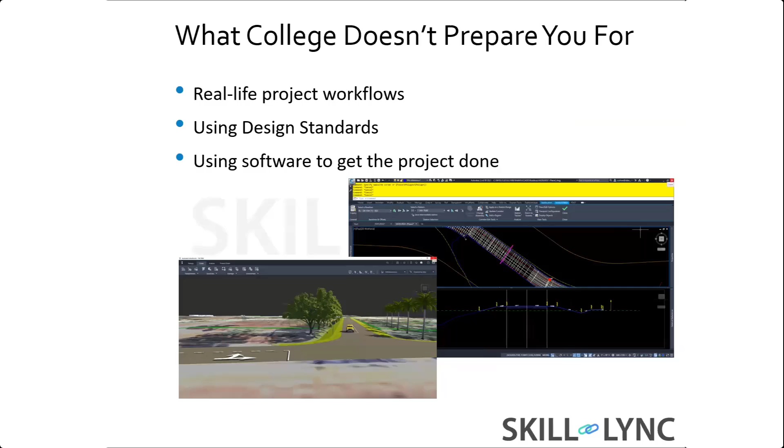Also, they don't educate you on using design standards, which is a crucial part of understanding how to actually get a project done. And of course, the biggest thing in this day and age is the software. That's really crucial for having a good basis for getting a good job and working with an engineering firm. All right, so let's go over today what the actual process is.

And again, every agency is going to vary. I'm in the United States, and every municipality will vary, but there is a generic workflow that you will typically follow. There's minutia in every part of the process, but for the most part, that's what I'm going to discuss in this presentation.

All right, so the first thing, and again, this is something you can do on your own, wherever you are, is really educate yourself on what the design standards are in your region of the world. Where are they? Where do you find them? Deciphering them. Just to give you some examples here, I'm in Florida in the States, and this is a set of Florida DOT standards.

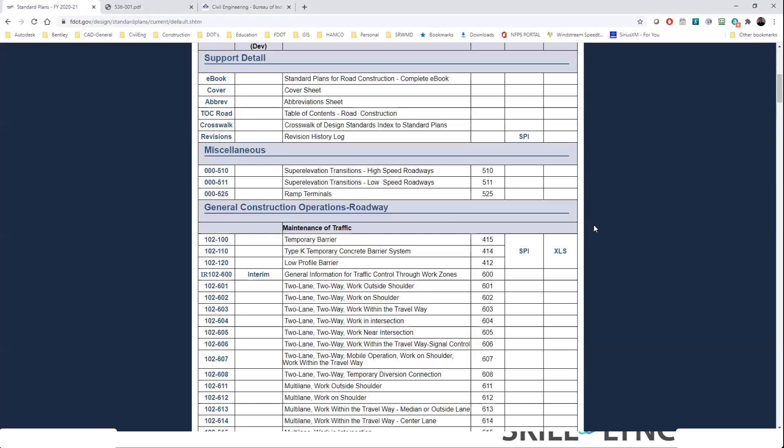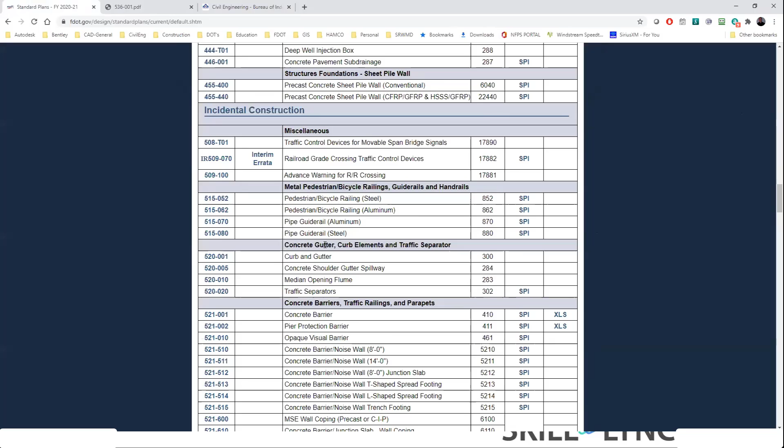The reason you want to be really familiar with these is that when you're designing your projects, the engineer will say, okay, did you look at the design standards? Have you checked this? So for instance, if I was doing guardrail design, you'll have these different numbers that relate to the specific thing that you're designing. So here's 536-001.

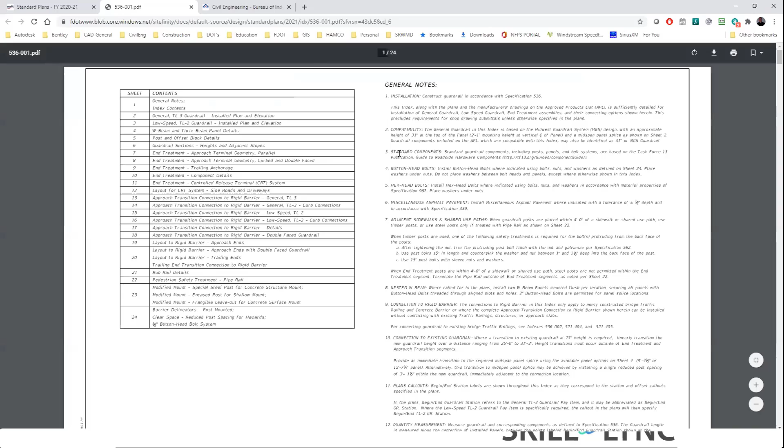If I bring that up here, you'll see there's a whole bunch of notes and dimensions and ways of actually doing this. So if you were doing some guardrail design and you're going to draw it up, let's say in CAD, you're going to have to know exactly how to draw that. And that's one of the things these standards will do.

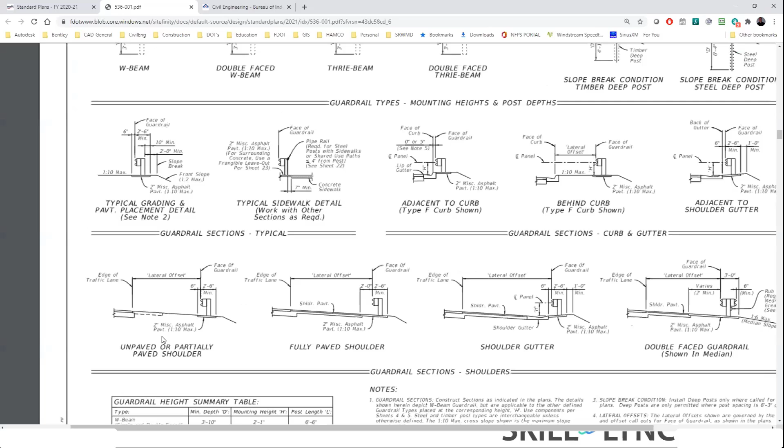So for instance, if I zoom in here, I have a project that is unpaved, it doesn't have a paved shoulder. So you're going to have some sort of lateral offset, and those will be defined here. And then here are the actual dimensions to design and show this within your plans. This is the type of stuff you want to get familiar with, depending on where you work. And of course, you're going to have multiple.

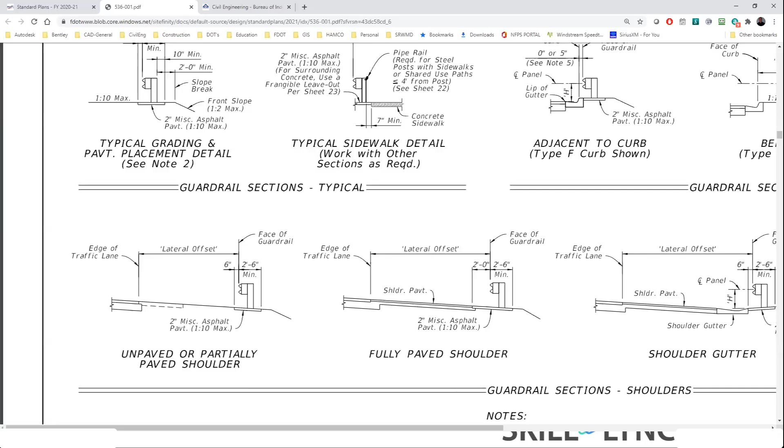You're going to have cities, counties or municipalities, etc. They're each going to have their own flavor of standards, and you have to work within all of them. So you really want to make sure you have a good grasp of what design standards are.

All right, so starting from the beginning of a project. Typically a project will either be handed down, or a county or agency will get funding themselves. Before you even start to build a project, you do a project scope. The reason is that initially they need to budget the right amount of money to get this project constructed. Of course, you're not going to invest in actually designing it, because what if the project doesn't get approved?

So each project will have its own specific design criteria. As I said, visit the project, and hopefully you'll have someone with experience to do it with.

And they'll go out there in the field, and you'll actually know, okay, well, we've got some bad paved areas here, we need to fix this. Or if it's a reconstruction project, basically a project that's taking a dirt road, let's say, and turning it into a paved road, there's all kinds of other things that need to be figured out. Like, are there going to be ponds needed?

Because typically agencies, if they're going to pay for a road to be done, they do not want to just repave that existing road. They want you to actually look at the current geometry, and do you need to fix that geometry? So if you do fix that geometry where you're actually going off of the existing road, you will have to create a pond. That is just the way it's done, because that road needs to be treated in areas that are newly within the actual areas that aren't road. Will a survey be required?

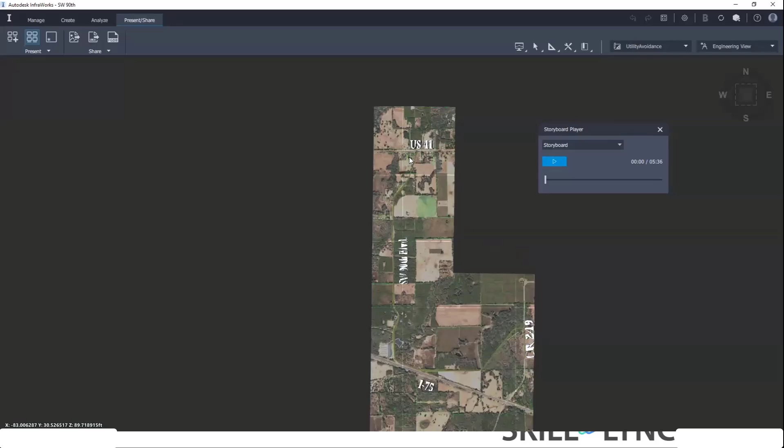One of the things you may do, I've done this on a couple of projects, and I'll show this to you, is you will have to do some preliminary modeling. And what's nice about some of the software out there is they actually provide a nice, quick, and easy way, and you can just get basically state agency data for surfaces, and it's not as accurate as it would be if it was actually surveyed, but it's good enough to get a general idea of what the project should be.

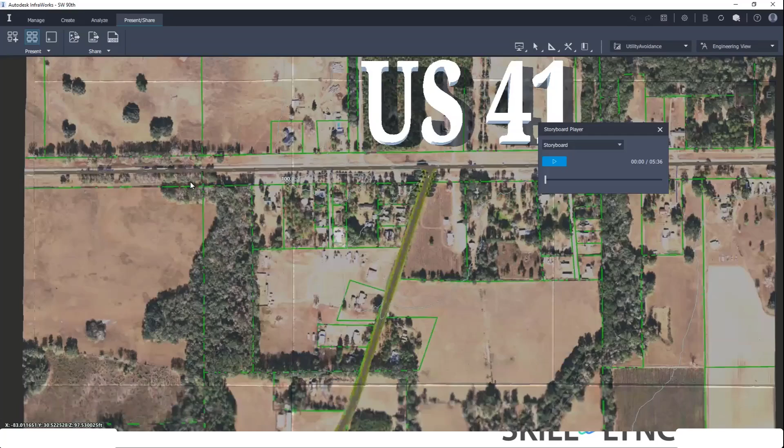So this project here is a 5-mile road, and basically it's a reconstruction. So it's going to pave the existing dirt road. There's a lot of drainage issues in this project, so there's going to be some spots where we have ponds and other things like that. This software here is called Autodesk InfraWorks, and it allows you to easily gather data. So you can see here, this is a parcel of a property owner. I've actually brought that in.

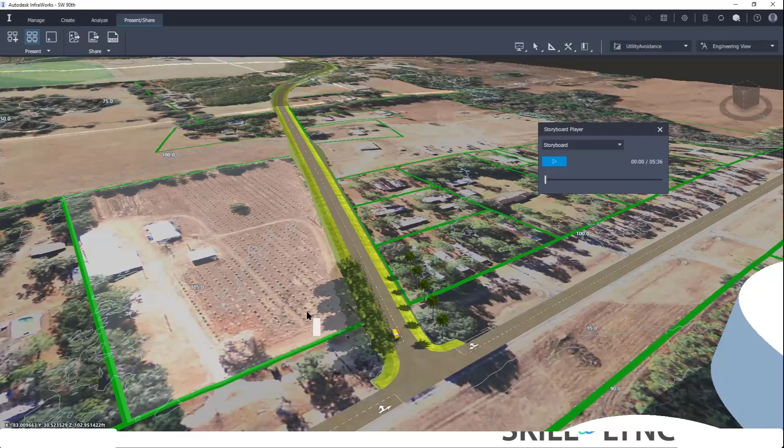Notice how it's actually in a 3D type way because the surface data was brought in through LiDAR, which is freely available from the Water Management District in this area. So if you don't have free data, you can usually get stuff from an agency, and you can usually download USGS or state contour maps. Okay, they won't be as accurate, but they'll be close enough for what you need to do. And the reason why I was doing this was to make sure that I could get this road to fit.

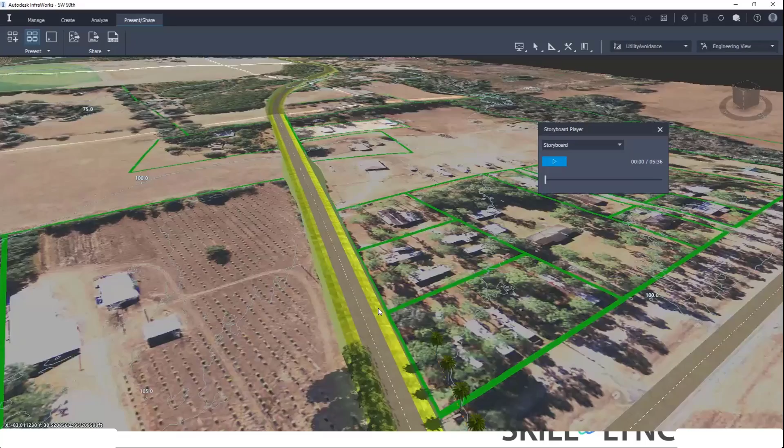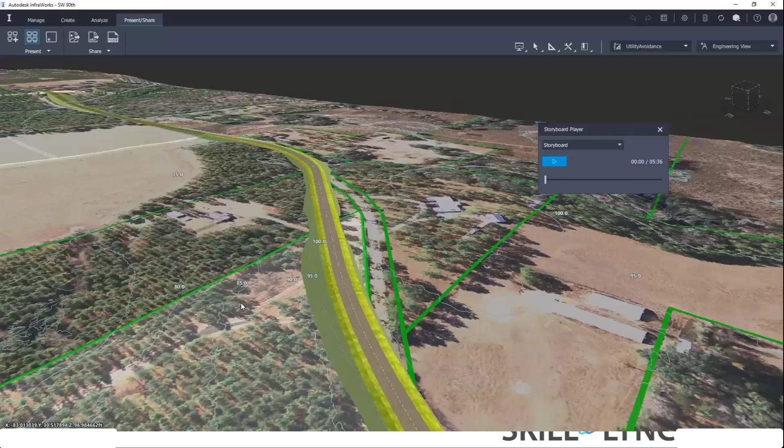You'll see here, as I'm going along, this is the existing road, but because this road needs to be put up to 55 miles an hour, you can't fit this curve. This curve is not going to fit within the realm of 55 miles an hour, so it has to be realigned. So by doing this, it was a quick and easy way for me to say, okay, yep, I've got a pond there. If we look at another spot here, I'm going to have another pond. Notice how I'm going off of the existing here, so there's going to be a pond over here.

And also, this was able to stay on. And this right here, because this was a 90-degree curve, we had to have a pond over here as well. And further on, you get the idea. And of course, it just allows you to see the actual project really nicely. Again, I'm not spending too much time doing it, but you're going to need to know these

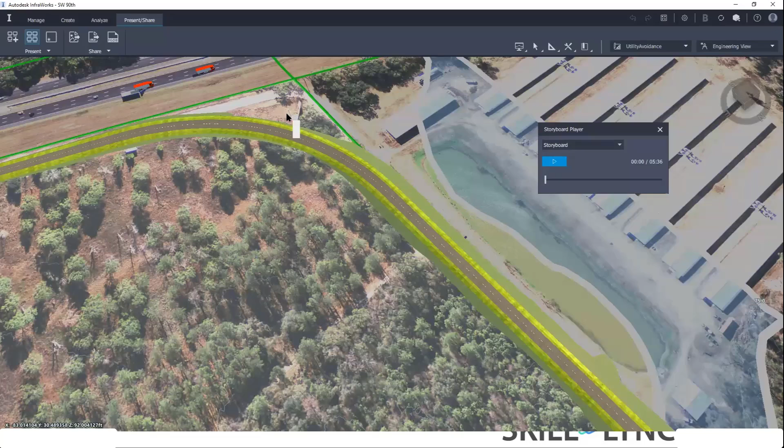because the other issue is right-of-way. So are you going to need to acquire right-of-way for that project? If so, the county or the state agency needs to know that because they're going to obviously have to pay the property owner to acquire that right-of-way. So those are the types of things that you'll do. Are there bridges, water crossings? I showed you that visualization because it's obviously something you may need to do to sell the project or show some of the issues that may occur.

One of the next steps that you would do is you would develop an estimate and a task work order. Okay, and the reason you're doing this is that, again, the agency needs to know not the exact, but a good amount of money, what it's going to cost to actually construct that project.

So what you do is you'll go through the project. Again, this is why you need to know, are there ponds? Well, that's going to require some additional excavation, right? So you're going to have some more cut volume. Are you going to actually have fencing? Are you going to have guardrail, etc.? So that's for the actual roadway project.

Now, at the engineering firm you work for, you may or may not be a sub, or you may be the main consultant where you will have sub-consultants like geotechnical or environmental mitigation, etc. So if you have to get borings, because every pond, usually the water management agency will require that you do one boring per acre. Basically, they want to see what the existing soil is going to be, so that you're making sure you put the proper pond in there. So that's going to require borings. So again, this is something you have to include in the estimate.

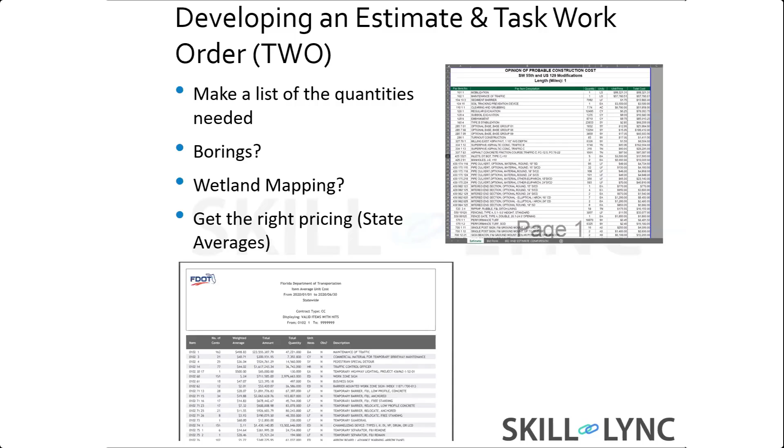Of course, once that's sent and then approved, then you'll get what's called notice to proceed. This will usually come from a state agency or a county commission or a municipality, depends on who's paying for the project pretty much. All right, so once you are ready to go, what goes first?

And so it actually depends on the project. So if you're doing a simple resurfacing project where all they're doing is milling the road and resurfacing it, you're not going to need survey, typically. Some agencies will want to see the existing ground, but most likely you don't need to. It's a very simple project where you're basically just getting a square footage or square meterage of pavement or milling or whatever it's going to be for the project. Okay. Now, if you're doing reconstruction where you're changing the alignment, you're changing the profile, you're going to upgrade that road, you're going to need survey.

Now, while survey is being done, you can start working on the 2D plans. And what I mean by 2D plans, I've actually got a set of plans here that's completed. So this right here is a quote unquote 2D plan. In other words, it's just text and an overall map of the project. This here, 2D plan. This too, 2D plan. And these are all 2D plans as well. It's just details of the project.

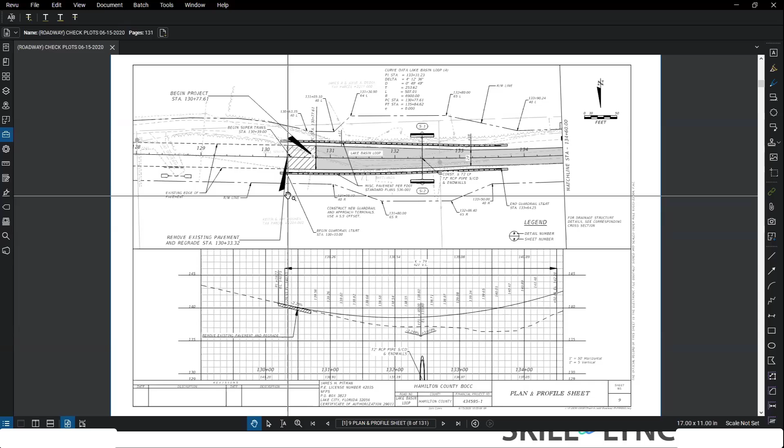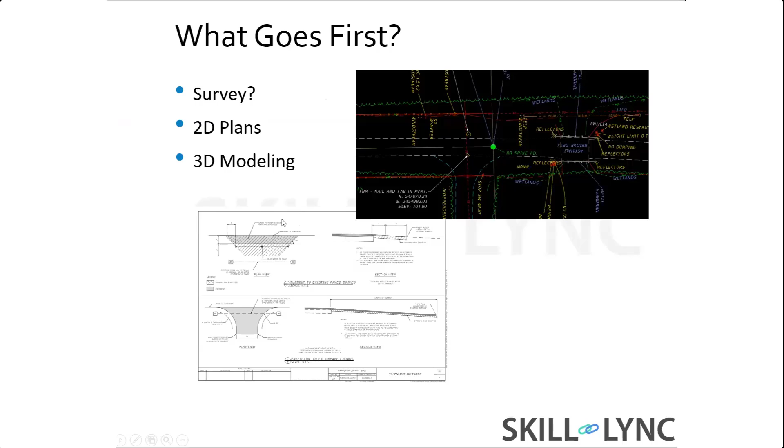Now, as we get to the plan and profile sheets, this is what I would call 3D plans. Again, this is a 2D drawing. However, it's getting the data from actual 3D information, like the profile right here and the horizontal alignment right here. Okay, so these plan sets you would kind of wait on, because obviously you don't have the plan and profile defined yet. But the 2D plans, you can begin doing, and that's probably what you would begin working on, because they're easy enough to get to while survey's getting done. Okay. Once that's done, then you'll start getting into the 3D modeling aspects of things. All right.

With a roadway project, of course, the first thing that you'll do, and again, you would have already kind of done this anyway. In the preliminary stages of the project, you would have defined a somewhat close horizontal, not vertical probably, but mostly a horizontal alignment. That way, you know what your corridor is going to actually look like. Okay. So that will be done.

But once you get the survey, then you're going to go in and fine tune that horizontal and really design the vertical alignment. You're also going to start to think about things like super elevation. If you're not familiar, super elevation is basically when you have curves in a road. You may or may not notice this when you drive them. The road should pick up on the outside of the curve, and on the inside, you'll notice that it's kind of going down, right? It depends on the way the curve goes.

This is a right-handed curve. It goes to the right. And so basically, the road will pick up so that, due to inertia and gravity and all that type of stuff, you don't feel like you're going off the side of the road, right? It helps you in the curve.

And so you have to think about these things because as you're developing your horizontal alignment, that transition into the super elevation and out of the super elevation needs to be calculated. There are spreadsheets that you'll use to do this. But if you're going in and out of curves, you have to make sure that your tangent runout ends before you begin another curve.

Because if it can't run out, then you're going to have to do what's called an S curve. That's basically where you go to level crown, and then it goes back up the other way. Let's say you have a curve that goes to the right and a curve that goes to the left. But if you can avoid that, that's better for roadway design. These are the types of things that you need to think about. And just to show this to you, actually in the CAD software here.

So I'm in a file here. This is a completed project, and you'll see here my horizontal alignment. This is following an existing road for the most part. In certain spots, it does not. So you can see here, I've got a pond, right over here. Because I'm not on existing, we have to treat that water that's coming off the road here.

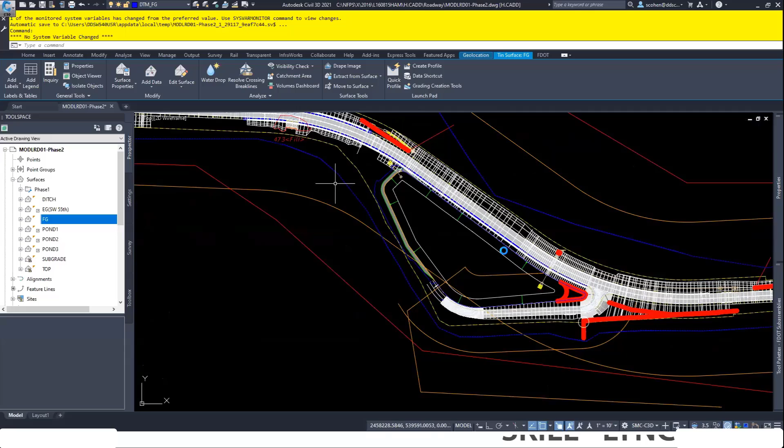But you'll notice I have these curves here. So this super is running out over here. I've got plenty of tangent or straight line area where I can run out that curve, that super elevation. Then as we come up here, this is fine. But if you look over here, this is a left-handed curve, but then I'm coming into a right-handed curve.

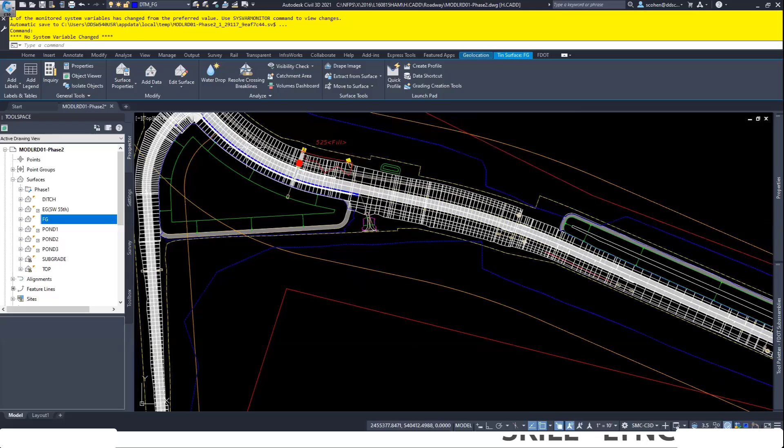So at this location, I could not run out. So this is like an S curve. It has a small tangent section, but the tangent section was not enough to run out the actual super elevation. So this basically goes up here on this side, then it hits zero cross slope both ways, and then it goes up the other way here.

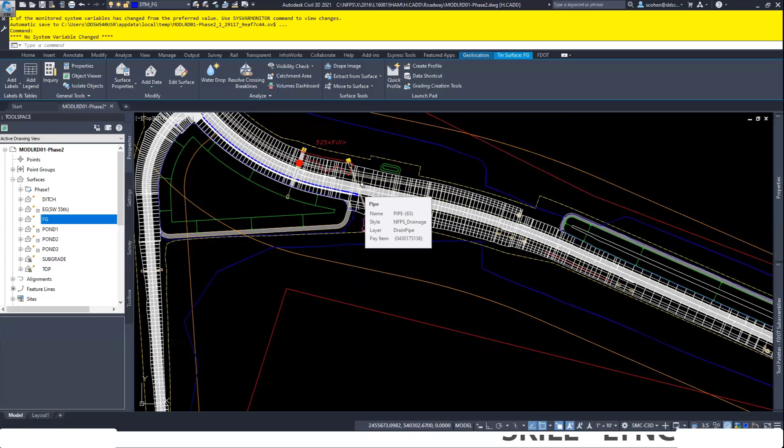Okay. So I had to tweak this alignment to at least get to that location in the horizontal to make it work. Okay, that's the horizontal. Then for the rest of this project, it pretty much just follows existing, so there's no ponds here. Now here's your vertical or profile.

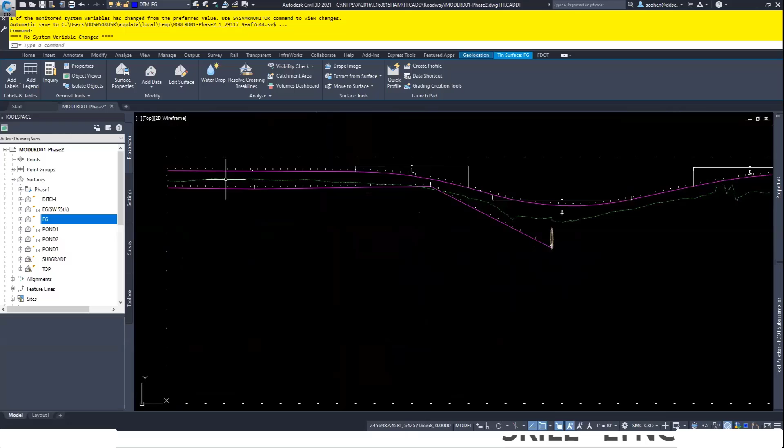All right. So typically, again, this is why you need to know your project. You know what is expected. When you design the vertical, you don't just slap it in there. The biggest thing you have to think about is drainage. Where is the water going? So in this case, you first want to know where your existing water is. So here's my existing. You can see I have a low. And so I have to make sure that my proposed goes exactly where that is.

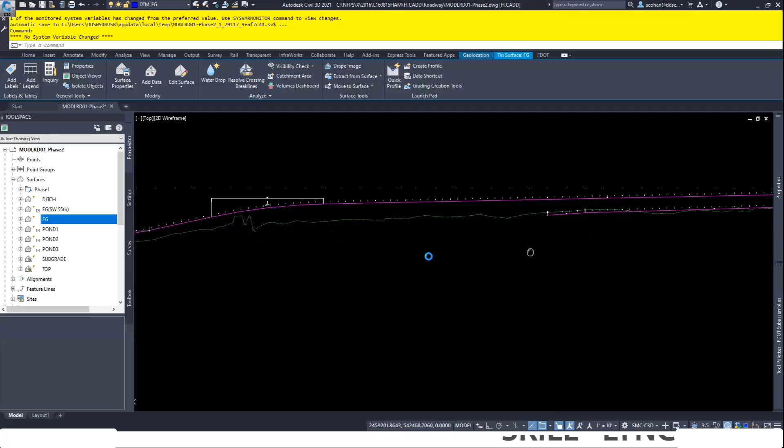We're not going to put a low over here, because obviously there are people who live on this road and flooding would occur, and they're used to what's going on. That's why you design your road to follow the existing terrain for the most part. You notice we have a bit of fill here. On this project the water table is very high in this area, so we wanted the ditches to be dry. So we have to raise the road for that to occur.

As you can see here, we're maintaining and following existing. Here's a low. And if you look here, here's a low. So notice how the road is doing that. And then you'll notice for the rest of the project here, this is actually going to a bridge.

So yeah, there's a little tiny bit of a low here, but for the most part, all this water drains into this creek over here. Okay, so as you can see, of course, things like this, I'm going to actually follow existing where it needs to be followed because I'm not going to change this location. This creek is working the way it's working for a reason.

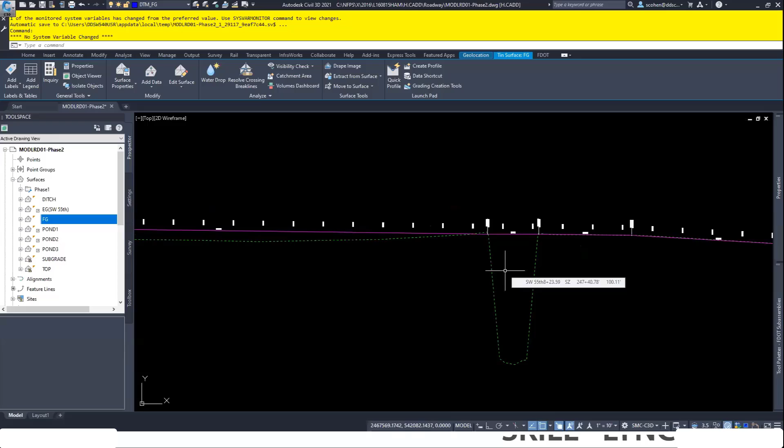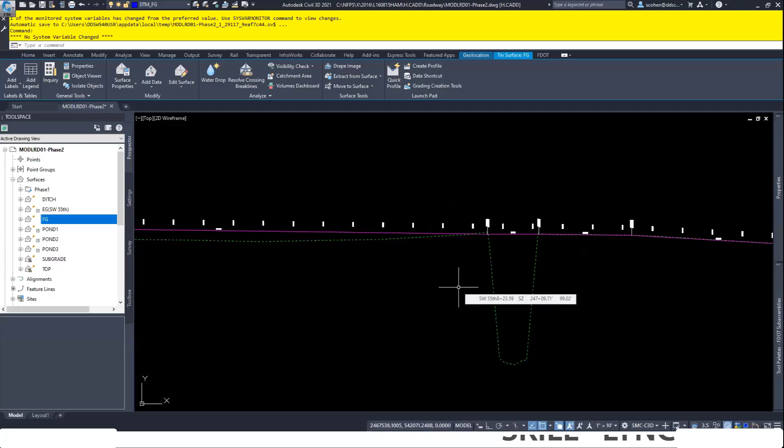Now, of course, as they're doing this, the type of stuff that you have to think about, a hydrology engineer is going to come in here and say, okay, we need to do a small little hydrology study to make sure that it's not flooding during an event of some sort. And you obviously then would either raise the profile, or if it's fine, you would keep it at the existing elevations. Now, again, we're based upon history of the road. If it's never flooded, that usually would be okay, but they'll still do a study just to make sure. So again, that's your horizontal and that's your vertical.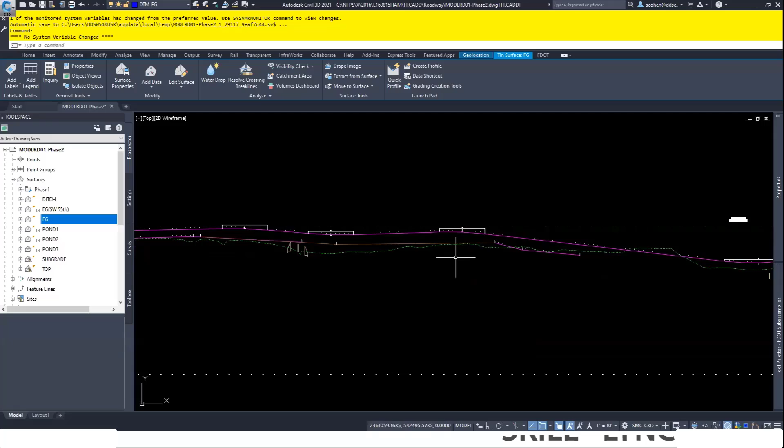All right. And the other thing you have to think about is balancing your cut and fill here. Now, the vertical alignment, if you're not familiar with it, is basically the elevation of the center line of the road, right? So this is like a cross section of the entire road and what it would look like. Okay, that's what the profile view is. And you can see here in most of the cases, I'm actually above because of this unique situation with this project. But for the most part, you'll typically be about a foot or two above the road because you need to take into account the new road bed. And basically, for your ditches to work, that's how it's going to actually tie everything in.

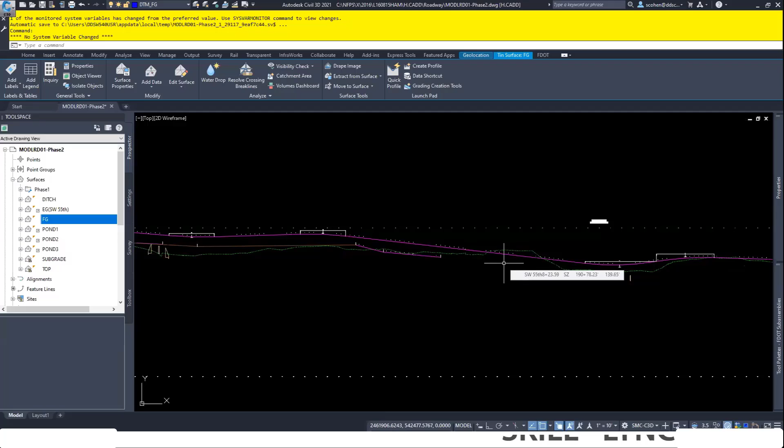But the other thing you have to think about is balancing your site, balancing your road. In other words, you don't want too much cut volume where they take out that dirt compared to your fill volume. I mean, again, every project is different. If you know you're going to have fill, then that's just how the project is going to be. But for the most part, you want to balance your road so that any cut that they take out of that road project, they can use as fill in the spots that need to be filled. So that's basically the stuff that you have to think about as you're doing your horizontal and your vertical.

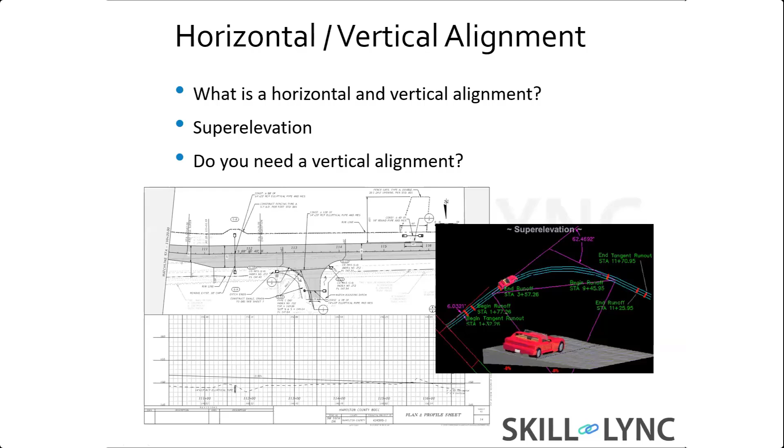All right. And like I said before, do you even need a vertical alignment? So if it's a simple resurfacing project, you're not going to have a vertical alignment. You'll just simply do a plan sheet where it's basically a plan sheet up here and a plan sheet down below. It just tells the contractor what happens at those different stations, whether you have guardrail or you're fixing a catch basin of some sort or something like that.

All right, so after you have your horizontal and vertical, and again, before you even do this part here, you would get that checked by the engineer. And you might even get it checked by the agency. It's usually because when you start to get into the modeling process or the typical section, where you do the actual road, you want to have that done.

Now, the great thing about the software that we use nowadays, it's all dynamic modeling. And what that means is if you change any aspect of the horizontal and vertical, it just updates the model. So it's really, really nice. Whereas in the old days, about 20 years ago, 30 years ago, you did not have that functionality. If you changed the horizontal and vertical, you had to redo your model or redo your cross sections kind of by hand. And so it was kind of a pain. Whereas now it's really not a huge deal if it has to be changed.

Okay. So once that's all approved, then you obviously already know your typical section. You'll have 12-foot lanes, paved or unpaved shoulders, and then your end conditions. Are you going to have a ditch? Are you going to have a fill slope, etc.

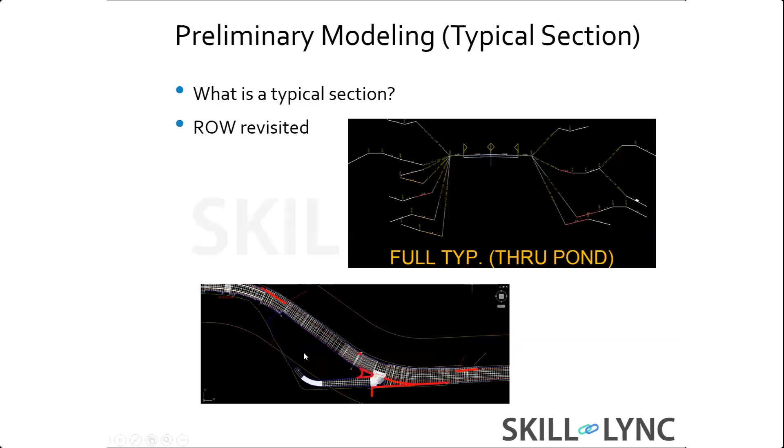Now, once that's done, you may revisit the right-of-way, because remember the right-of-way was thought about beforehand, but that was just preliminary. That was just basically conceptual modeling. It wasn't even really modeling. It was just more of, hey, can this kind of road fit with these basic variables? Once you now actually have the road, you may actually have to revisit and redo your horizontal. So you might be going back to this stage here, where you may or may not have to be concerned with right-of-way. All right. And just to show you that here, so this